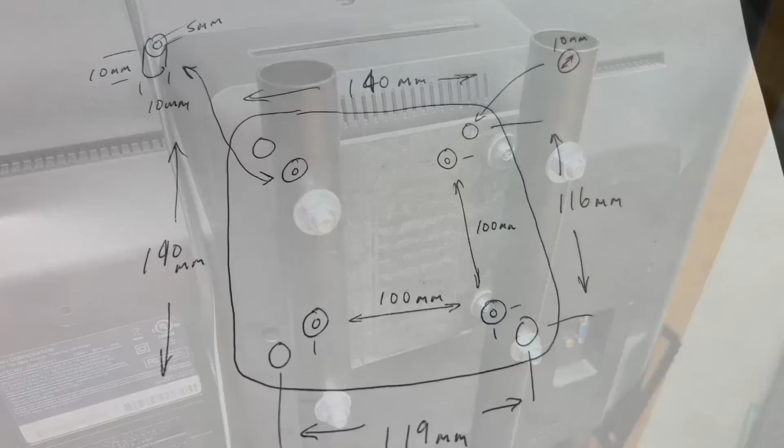A friend of mine challenged me to make a custom bracket to mount a TV to a TV stand. He gave me all the dimensions, but required that I did it in Tinkercad. Could it be done? Let's find out on today's Filament Friday.

The first step was to open Tinkercad and then make the base. I'm just going to use a cube here, and I'm going to drop the ruler so I can get some accurate dimensions. So I'm going to make this thing to his dimensions, 140 millimeters by 140 millimeters. I'm also going to make this thing 6 millimeters thick, and then I'm going to cut off the bottom because I'm going to round it.

In Tinkercad, there's a setting you can put a radius on the corners, but it radiuses top and bottom as well. So I got it to where I want it. You can see there's a little bit of a lift that I want to get rid of on the bottom. So for that, I'm just going to bring in a hole block. This takes away material, spread it across the whole thing, drop this down to 1 millimeter tall, group this together, and now I'll have a nice flat bottom on this thing, but rounded corners.

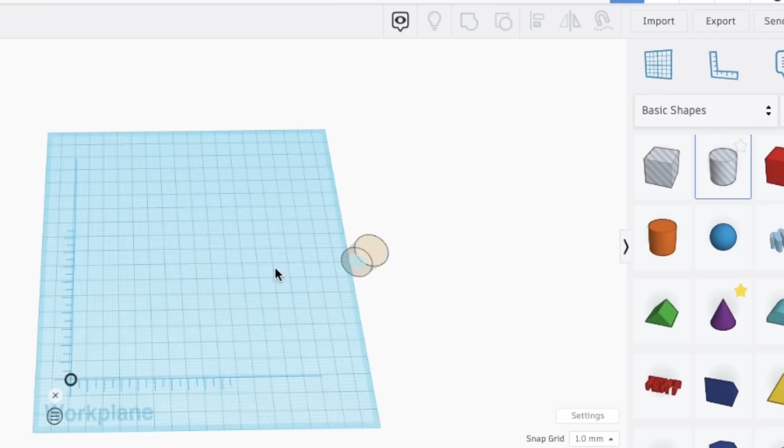Now it is offset from the bed by 1 millimeter, so I'm going to set the offset to 0 and drop this back down on the bed. Now I need to make the first set of mounting holes, so I'm going to shove this plate to the side, and I'm going to bring a round cylinder, but this is a hole cylinder. It takes away material. And I'm going to round the sides to the max 64 edges, so it's pretty smooth. And I'm going to make it 10 millimeters by 10 millimeters because that's his dimension, and I'll leave this tall because it's taking away material.

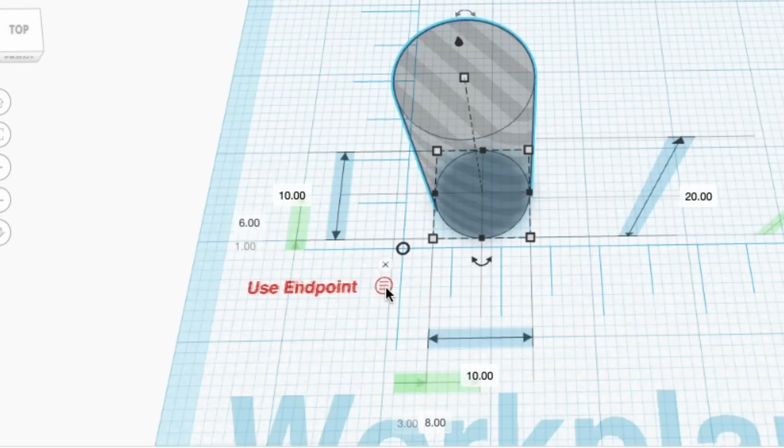Now here's a trick with the ruler. You notice it's offset from the ends, but I'm going to click on the 3 lines to make it midpoint. I want the ruler midpoint. So now you can see the center is 6 millimeters and 8 millimeters away from the 0 point of the ruler. So if I make those both 0, now this cylinder is truly right at the 0, 0 point.

So now I can just come up here to the duplicate button, duplicate this thing, and I've got 2 of them. And I just need to offset it by his 119 millimeters. Boom, now I've got 2 of them perfectly in line, perfectly centered 119 millimeters, center to center like he wanted.

Now I'm going to group these 2 together, and I'm going to make a duplicate of these 2 because I need 4 holes. Now I'm going to set the offset on the side here to 116. So now I've got 4 equal holes perfectly placed center to center the way he wanted them. Now I'll group these together, and now my holes are set. So I can just shove this aside, and let's work on the next set of holes.

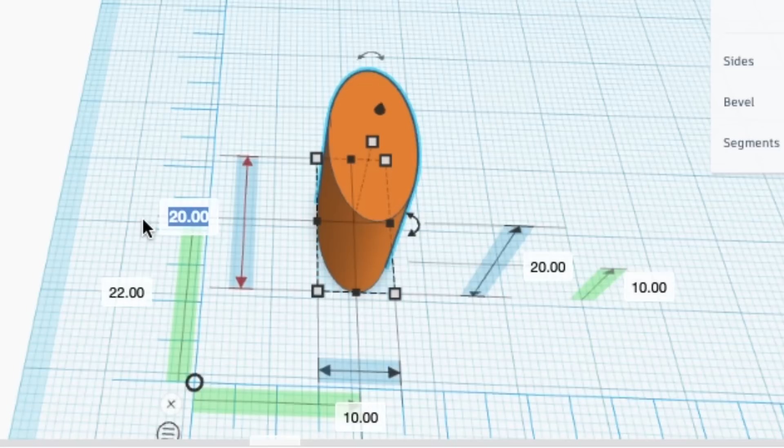Now this next set is actually a standoff and a hole, so I'm going to bring in a solid cylinder, round the sides and make this to match his dimensions. Again, this one is 10 millimeters by 10 millimeters, but then he wants a hole in the center of this. So I'm going to make it 15 millimeters tall because that matches his dimensions as well. And now I'll bring in a hole cylinder and make this 5 millimeters by 5 millimeters and leave it tall so it'll go all the way through this thing.

So I'm going to center him. I'm going to use a center tool, or align tool really—click on the cylinder, and then the X and Y buttons puts it perfectly in the center.

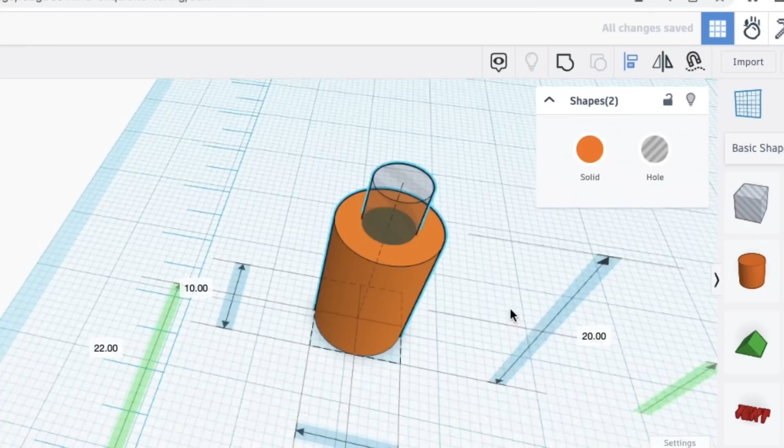Now I actually need to drop this hole down a little bit so it'll cut through the base plate as well. And now I have my first post.

So now I just need to set this to 0, 0 on the ruler. I'll grab both of them, and I'm still at the midpoint setting, so now I can change the settings to 0 and 0. And now this thing is perfectly centered at the ruler.

So now I can do the same trick. I can duplicate, because I've grabbed them both, and move this over 100 millimeters, which matches his dimensions.

Now this gets a little tricky because I've got two elements here, so I've actually got to group these together, but it's going to put the holes in the mounts. We'll fix that later. So I'm going to do the same thing—duplicate these, offset them by 100—so now they're perfectly positioned where he wants them.

So now I can group those together, and I've got my second set of mounts and holes. Now I want to group all these together and center them to themselves.

So I'll grab them all, and then I'll use the align tool, and I'll align them in both the X and Y direction, so everything is now centered around the base plate.

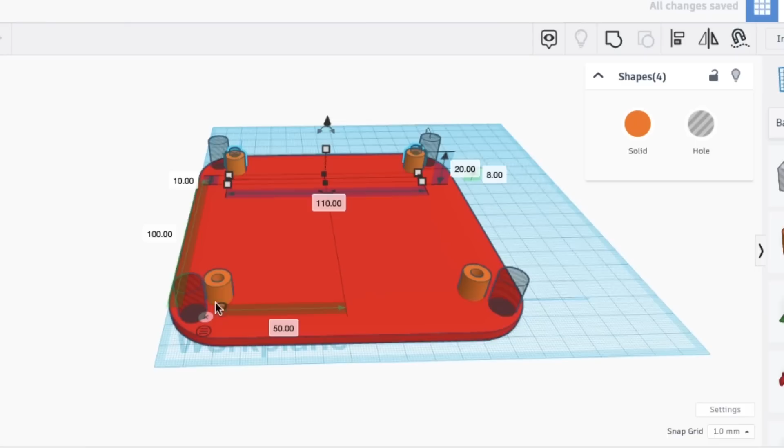But the mounting holes are actually not going through the base plate. So I actually have to ungroup these mounts so the holes appear again, and then regroup this thing so those holes will actually go through the base plate.

So once I've done that, I group it all together, and I've got a completed base exactly to the dimensions that he wanted. The first prototype printed fine.

I did use some glue stick to make sure it stayed flat, so that's got to be cleaned off. But the outer screws went through the holes perfectly. It mounted to the TV, spot on, and then those bolts went perfectly into his mounting brackets.

So he now has a TV mounted to his stand with a 3D printed bracket designed in Tinkercad. There you go—it can be done.

Now, I know a lot of people will say, oh, you should have used Fusion 360, you should have used some other CAD, but I just wanted to show that Tinkercad can actually do accurate designs, and it's really not that hard with a few tricks.

So if you're a Tinkercad user, or you think Tinkercad can't do an accurate design, hopefully I showed you how to do it. Let me know what your thoughts are in the comments below.